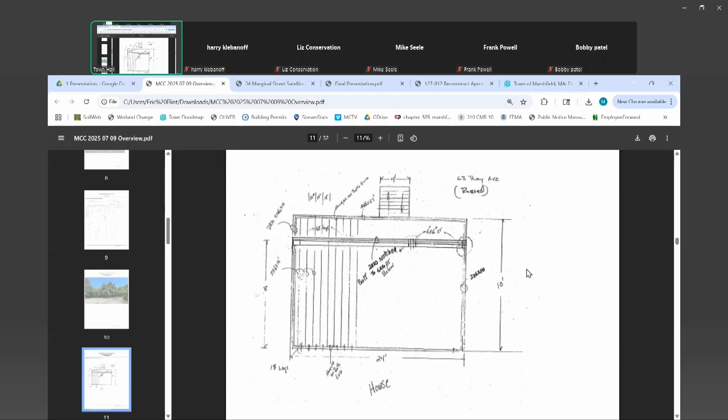Please state your name for the record. Douglas LeBon. Can you go over what the project is? Yeah, basically there's an existing deck there now. It's 24 by 8, we're gonna make it 10 by 24 and relocate the steps like it shows there. We're gonna put the footings back in the same spot, but we're gonna be using diamond pier, so there's no real penetrations. We're basically just looking for permission to use the diamond pier footings for the project. Okay, yeah, I visited the property. I saw, this stuff needs to be replaced. Yes.

The building commissioner had a comment about this project. He said on their plans they show a concrete pad at the base of the stairs, but the code requires a frost step footing, like a sonotube or diamond pier. Slabs like that for stairs are not recommended in areas like Bay Ave. Add one more diamond pier at the stairs. Okay, yep. All right, I think that would resolve that issue.

Mike, did you have any comments? Yes, I would suggest the following on the cover letter for this project: ensure best management practices are followed before commencing the work, obtain all pertinent permits, and see the conservation administrator or agent for work beyond the approved work activities.

Are there gonna be any changes to the area underneath the deck, or is that gonna remain the same? It's just the same. It's gonna cantilever out 2 feet. But as far as any material underneath the deck, no, just leaving the sand and everything like that, yep.

Do any of the commissioners have any questions or comments? I would just state that if you can amend the plan to show that you're going to do the diamond piers and not the slab. Yep.

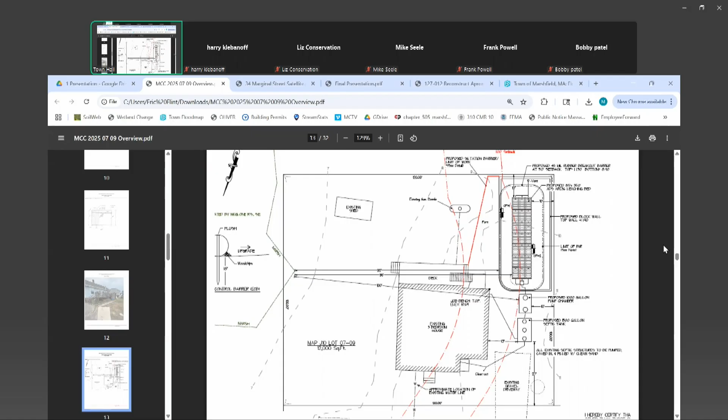Okay, yeah, I was out there the other day. It is going to be a tight fit.

Yes sir, I think there's a fence bordering that corner. And then a bunch of, like, 8, 9, 10 trees are going to have to come down. There's some trees along there that are marked. I was counting, and there were some things that weren't marked that I thought might have to come down as well.

It's going to be fitting there. The Board of Health has approved the project.

I mean, it looked pretty straightforward to me. Obviously, whenever you're getting rid of a cesspool with a state-of-the-art septic system, it's a step in the right direction.

Michael, do you have any thoughts on the project? Yes. The upgrades to the septic system would include the following: a 1,500-gallon septic tank, a 1,000-gallon pump chamber, and an 8.5-foot by 35-foot leaching field.

A portion of the leaching field will be within the 100-foot setback, and the property is within an AE10 flood zone.

I would suggest the following conditions: ensure best management practices are followed before commencing the work, obtain all pertinent permits, see the conservation administrator or agent for guidance beyond the approved work activities, and have a siltation barrier in place throughout the duration of work, as noted on the site plan.

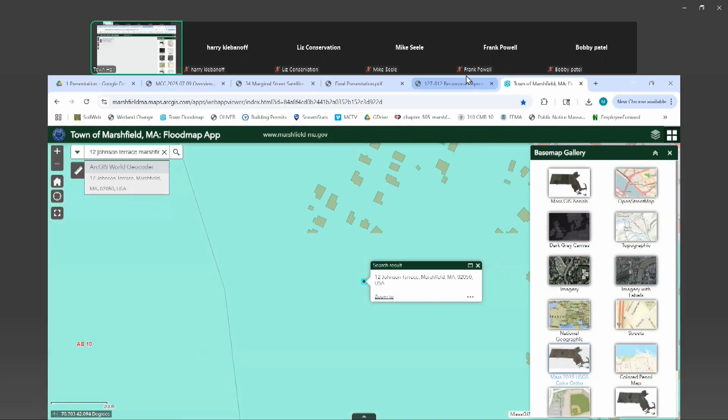The salt marsh is at the end of the street, not far from there at all. Within 100, but is it within 25? I think it's a moot point if it's past that. I think that whole area is in the flood zone, isn't it? Yeah, it is. I just assumed it was.

Is there anyone on Zoom or in the public that has any comments or questions on this?

Mike, do you want to list out your comments here? Yes — ensure best management practices are followed before commencing the work, obtain all pertinent permits, and seek guidance from the conservation administrator or agent for guidance beyond the approved work activity. Also send photos of the completed work to myself or the agent.

Do you have a question? I do — Mike, the access form and the fee?

Oh, you're assigned right now. Yes, the homeowner later came back and paid the after-the-fact filing fee. He was very adamant and refused to sign the site access form. I gained access to the other side of the drainage ditch through a different property that allowed me to access the site.

It's a fairly small section of the drainage ditch, and I'd be comfortable with photos. That's fine. I just was curious on that. It is atypical, though — thank you for pointing that out. Sorry, I didn't explain that.

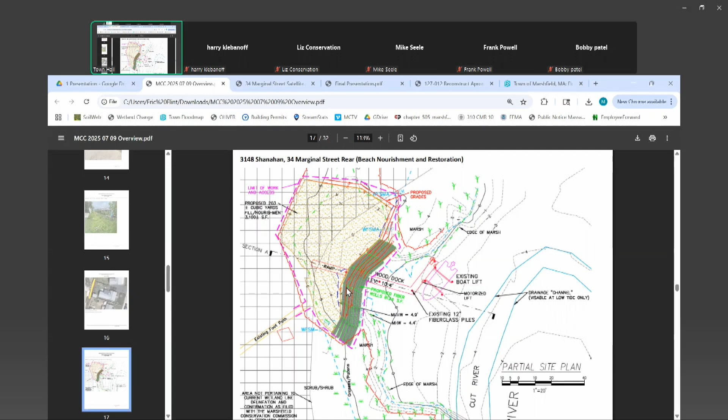Mike, did you have any comments on this?

As you can see, the applicant is proposing to place about 203 cubic yards of fill/nourishment to this highlighted area, and it's proposed to be supported by these coir logs as well. This amount of fill would need a variance from the zoning department. This is the area roughly where the coir logs would go, and then this area behind would be the area to be filled.

Are there any comments from the commissioners at this point? I've got one. Mike, it references, was it 11 Naomi, quite a bit? Yes, I was around when that one was permitted, but I can't recall.

I recall using the coir logs. Was there any fill associated with that one? I would have to take a deeper look into that project folder, but to my knowledge there was no fill associated with that, or minimal fill compared to the scope. I think they had backfill to do the plantings within, to facilitate plantings. Yeah, it wasn't as extensive as mine, but.

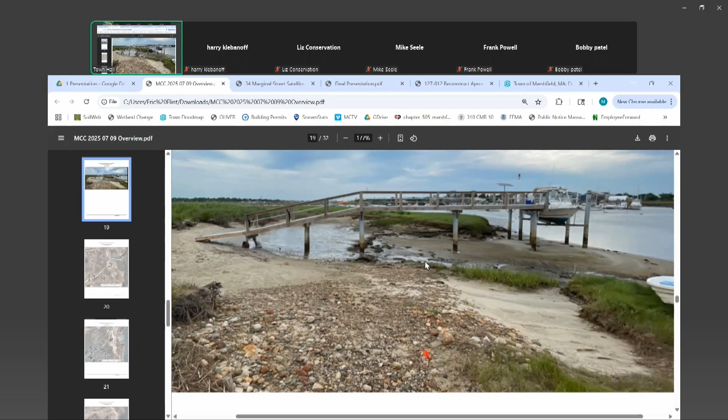So I'm sorry to be long-winded, but when regulations are written, they're written a lot of times for a certain purpose. A lot of the regulations, especially in the floodplain, are written for development of a site, for a house, with your setbacks and all of that, I get it. And they don't necessarily focus on shorefront erosion or the environmental issues and natural occurrences of ocean processes. It's just not on their radar because it's not a great percentage of the projects that they see. So when somebody says you can't fill in a floodplain, okay, if you're doing it for a house, I get it. Nourishment, can't avoid that terminology, but beach nourishment is generally a good thing.

The only time beach nourishment is a bad thing is if you are nourishing an area that has shellfish in it, or you have fronting salt marsh, which we don't have. If you overnourish, that nourishment washes in and buries the salt marsh, and it can only compensate for about a foot of elevation a year. It buries the salt marsh, wipes it out. So there are cases where nourishment is a bad thing. I do not believe that this is one of them. So I guess I'm interested to hear why this project is so different than 11 Naomi Road. That would help make some clarifications for me.

With that, I'll open it back up to the board. Do you want to respond, Corey? So I wasn't here when Naomi Road was permitted, but as far as I know, that project put the fiber rolls directly onto the bank and didn't put fill behind them. So they didn't try to extend the beach area, they just put them on the bank to stop the house from falling in. But I could be wrong. Do you recall? Comparing this to Naomi Road, I believe, is apples and oranges. It was a different resource area, and yes, it is not the same as this.

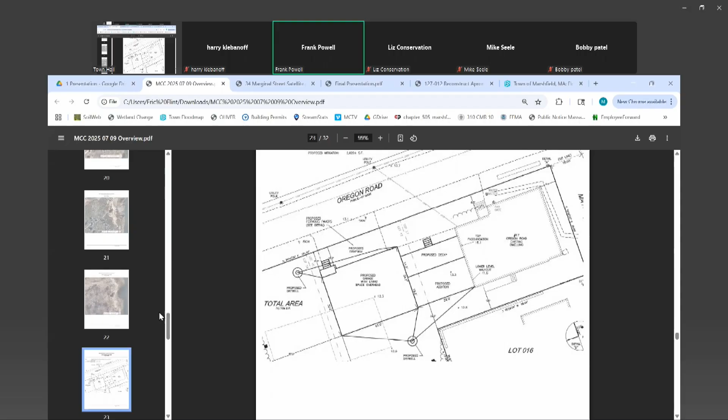It is closed. You know, Chairman Hanafin, you are the most unprofessional person. You have no personality. I muted Mr. Powell. That's okay, I think that's a requirement. Thank you for your comments. Okay.

Now we need to go back to our first hearing, which was 915 Ocean Street. That's Mr. Patel. Yes. Okay, this is...

He has two screens open or something. Sorry, Mr. Patel, I'm going to mute you until you're ready to speak because there seems to be some issue with our feedback where we're hearing our own voices coming through the audio. So feel free to unmute yourself once it's time for the applicant comments.

Okay. So this is an after-the-fact RDA, correct? So the property owner repaved a portion of the property without permitting. It's in land subject to coastal storm flowage and buffer zone. So the enforcement, there was an enforcement order in 2018...

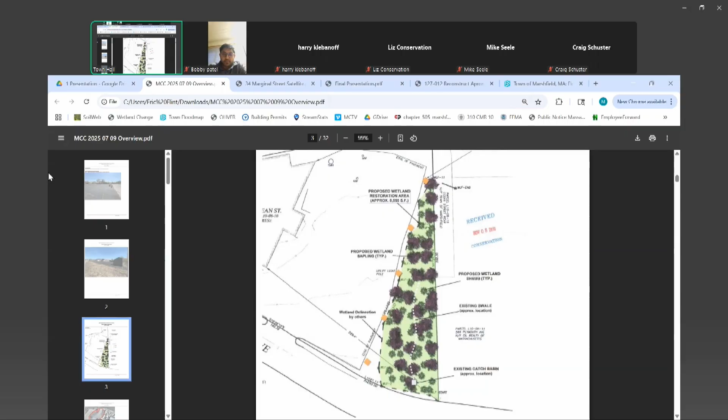My comments would be to install the conservation markers, the 5 markers as noted on this planting plan, ensure best management practices are followed, obtain all pertinent permits, and seek guidance from myself or the agent for any work beyond the approved work activities.

Okay, any other comments from the public? Hearing none. From the commissioners? All right, well then I'm going to make a motion that we close the hearing and issue a DOA with a +5 and a -2. May I have a second? Second. All in favor? Aye. Aye. Okay, Mr., okay, you're all set. Thank you, have a good one. Thank you.

SE 3147 has requested to be withdrawn. Do we just withdraw? Do we have to? It never opened, right? It never opened, so if it never opened, I don't believe we have to create a motion. We have to withdraw it since it was never opened. Okay.

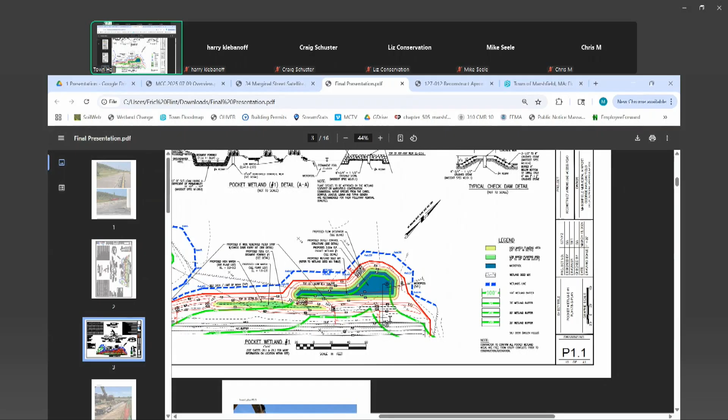So the next slide shows you what the new design is. That's moved 13 feet to the northwest, and while it looks a little bigger than the other pocket wetland, it's actually smaller by some 224 square feet. It's designed to comply with DEP stormwater regulations, which is why the design configuration has changed a little bit. But it's actually a little smaller than the previous design by 224 square feet, and we want to move it 13 feet toward the northwest to provide that safety strip.

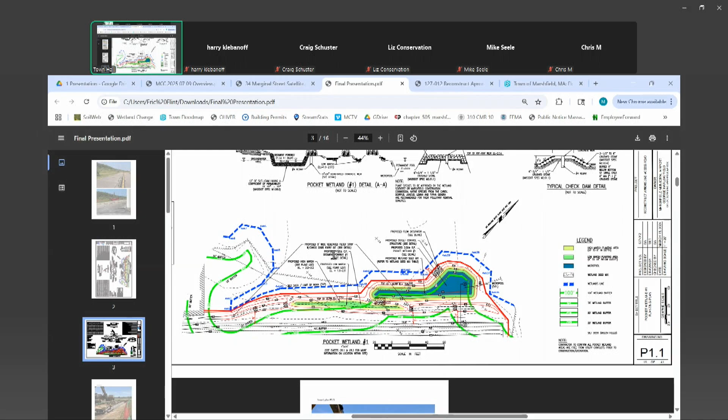Now, that's not much of a problem, because it's just moving it onto the grass strip. It's not moving it into a wetland or anything - in fact, it's creating a wetland. But it does initiate other issues in terms of trying to get equipment to it to build this pocket wetland number one.

The original design did not consider the fact that equipment was going to have to move through parts of the airport that would possibly present conflicts with aircraft. So the contractor from Lawrence Lynch has suggested they would like to build a temporary bridge across this drainage structure, which is part of the approved project. This is a drainage ditch being revised to allow pipes to be installed to improve the drainage. This is all part of the original design that's been approved.

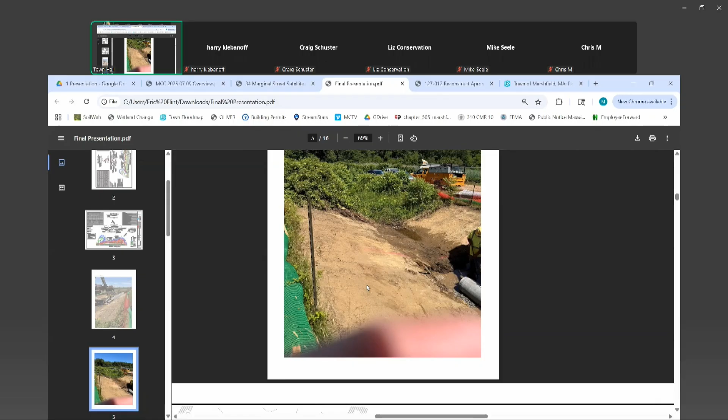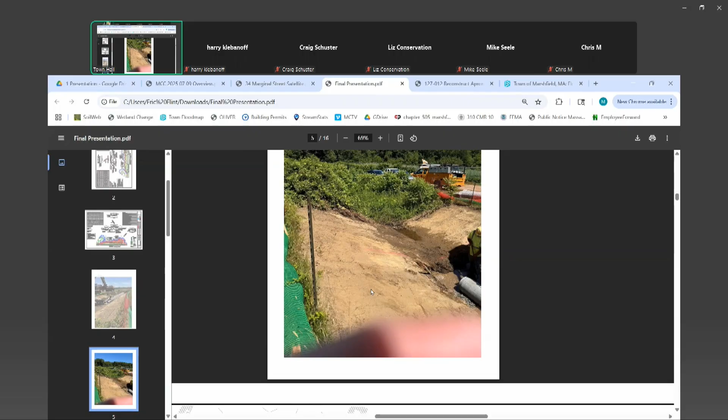This is at the end of the existing pipe where the head wall may be going, looking toward the area where we want to cross with a temporary bridge to reach that grass strip, so we can build pocket wetland number one without presenting conflict of equipment with aircraft coming in from the other end of the airport. This drainage ditch being cleared and constructed right now abuts, to your right, the access road to this part of the airport. There's a roadway you can't see here, but that's the access road out to the airport, and that's part of what this project is improving as well.

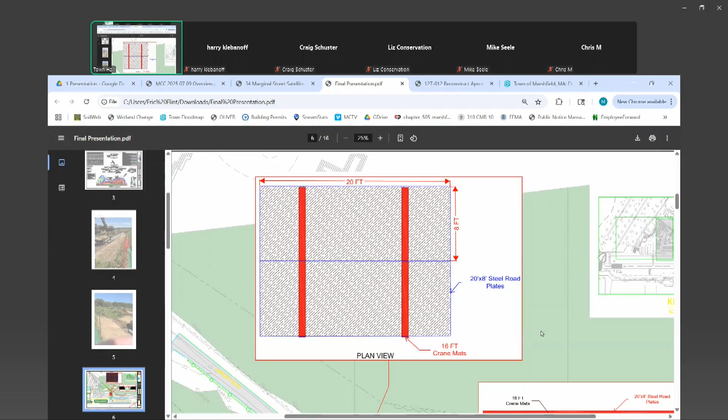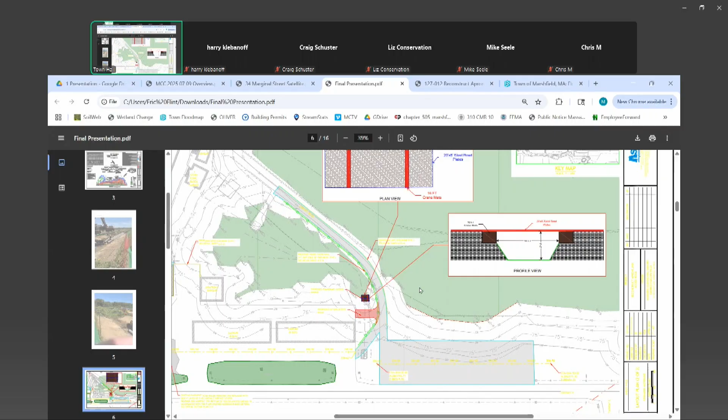This next slide shows you the proposed temporary bridge structure. It's that small black square above the red, what looks like a bridge in the lower right where Mike has the cursor. That black square is what's pictured to the left in the center - a cross section of it.

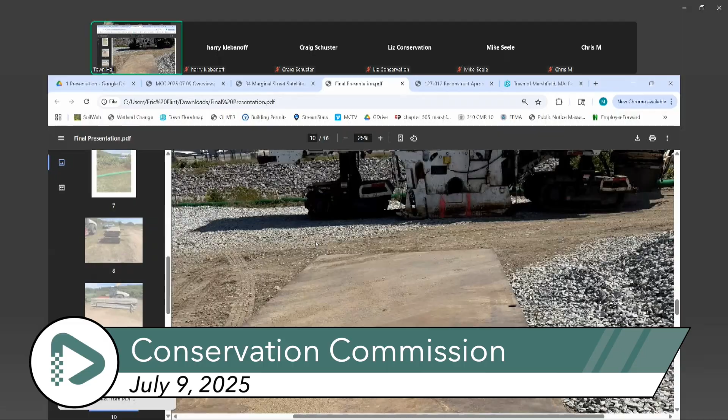It's constructed with 16-foot-long wooden crane mats, which are those black squares. They're 16 feet in length, and they're buried into the side of the drainage ditch. That's what those mats look like - that's the butt end of the mats. You can see them from the side in the next picture - that's what the side of those mats look like. They'll be buried into the side of the drainage ditch, then topped with road plates, which are 20 feet by 8 feet in width, steel road plates, forming the surface of the bridge so equipment can cross the drainage ditch from the access road to the area where we want to build pocket wetland number 1, which is again 13 feet deeper into that grass strip.

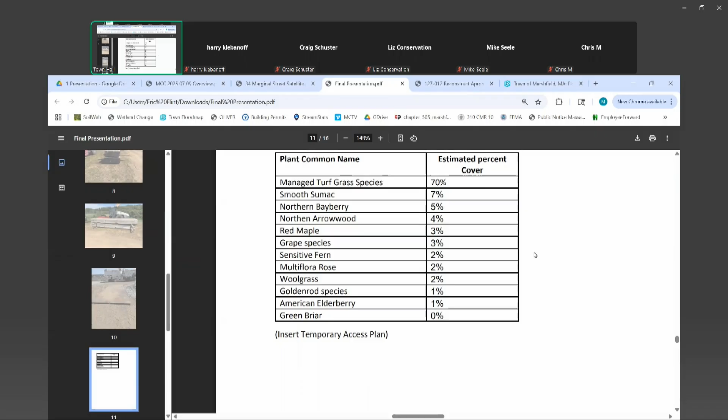That describes the project. I think what the next photo shows is the species of vegetation that are likely to be encountered in the drainage ditch itself when they put this thing in. This thing is probably going to be about 30 feet wide when it's all done. The disturbance will be about 30 feet wide because they have to get in there with equipment and clear it out. But once construction is completed,

the bridge will be removed, the beams will be removed, and the vegetation will be allowed to grow back. So it's a temporary measure to avoid conflict. It's a safety issue, and it's only a temporary situation.

This next photo is the third issue we're going to talk about this evening, involving another pocket wetland, number 3. The red rectangle you see represents the platform which fuel trucks pull up onto to refuel or to transfer fuel from the fuel storage area, which is depicted to your left of the red rectangle. That's where the trucks pull up onto, and that's where the fuel exchange takes place. Some fuel is pumped in, some is pumped out.

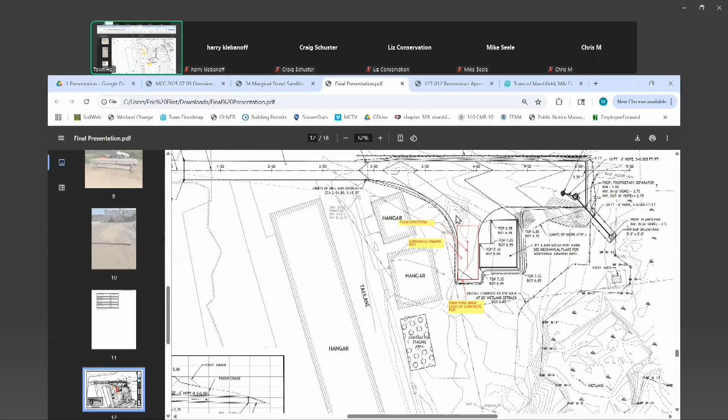On this plan, you can see to your left a wetland line. Mike, if you can put the cursor on that dotted line down to the left. See that wetland in there? Yes, the wetland flags here, that's the wetland area. That fuel facility was built back, I don't know, maybe 5-6 years ago.

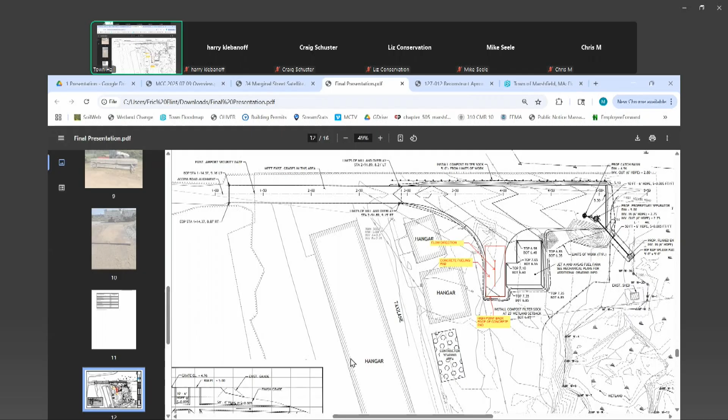It was permitted. And those wetlands are about 55 feet away from the edge of that fuel parking area, the red rectangle where the trucks park. That's the original setup. Now, if you go to the next slide, Mike, this is a picture of the new pocket wetland number 3, which is being constructed.

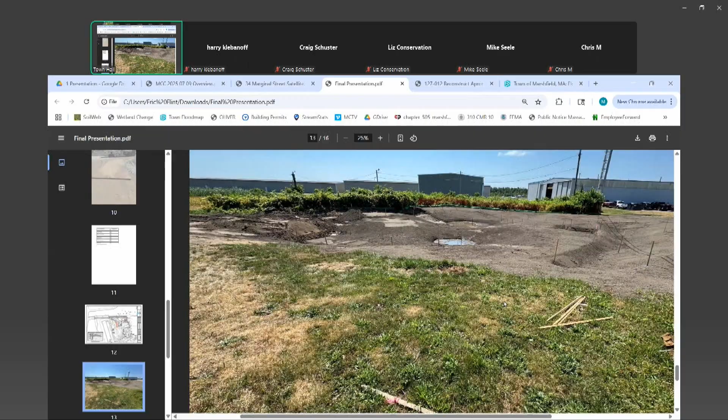That picture I took the day before yesterday. You can see it's a fairly complex pocket wetland with a lot of different weirs, et cetera, that are going to be installed in it to provide for treatment of stormwater. However, on the left-hand side, which you're looking at, it abuts right up against the edge of that platform. So if you could show the next slide, Mike.

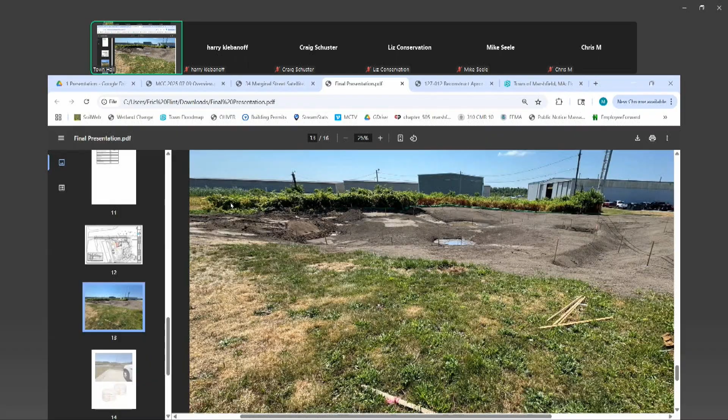You can see that's the edge of the platform, and that's where the pocket wetland is. So this new pocket wetland, which didn't exist before, is being constructed right up against that fuel facility. My suggestion to you is that you might want to consider

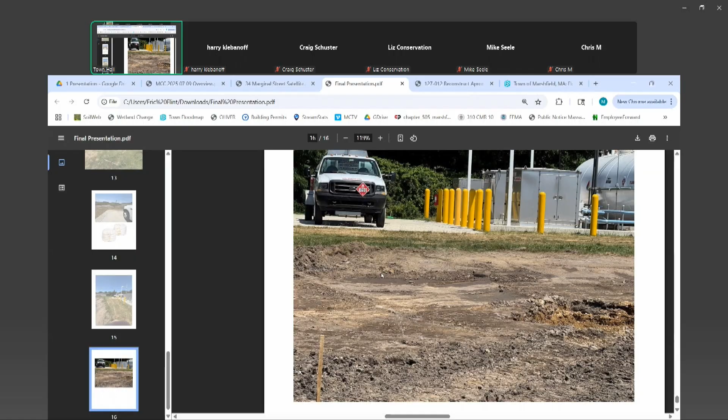Bill, the pocket wetland, everything just, the stormwater isn't carried anywhere else, it just infiltrates in the wetland there. There are a bunch of weirs in there, and some of it is going into the other wetland that's already existing, is the way it's designed.

Pocket wetlands are typically implemented with high groundwater areas. They have micro pools and deep pools, so it allows the water quality volume, like the first flush of runoff, to remain in the wetland and basically evaporate, as a wetland does. Then for higher storm events, it will go over an outlet control, a weir. I haven't seen the design of this, but that's typical.

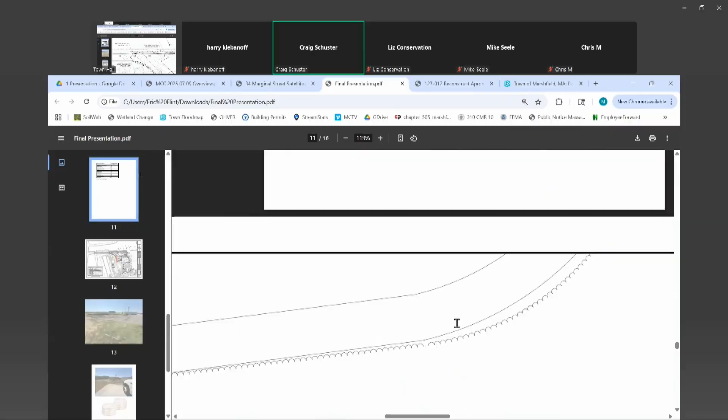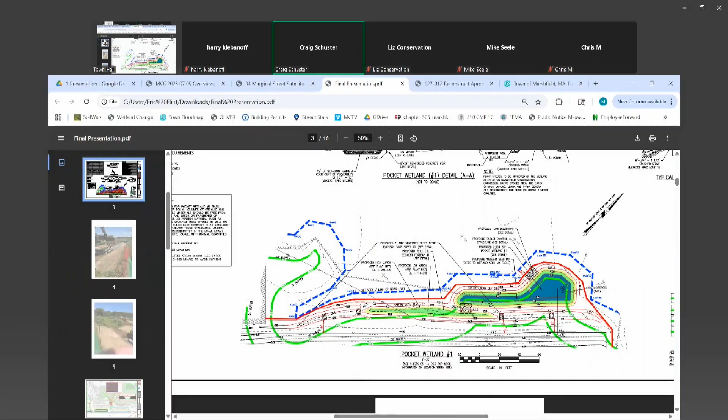I think we have the design. Craig, do you have a plan? Yeah, Mike, what you just said is correct. It's like you handle the first flush and it's really retention, then the higher storm events eventually go over weirs and other things and do go into the wetlands. That's basically the gist of the stormwater treatment systems we have. That's not it, no, I don't think we have wetland number 1 there, Mike. I have the full conformed set. Do you know what page it might be on? Like S11, P11? I think it would be P3. Possibly, I'm satisfied on the plans.

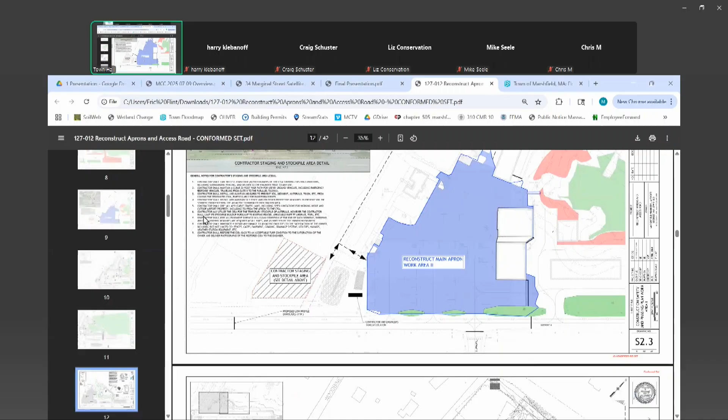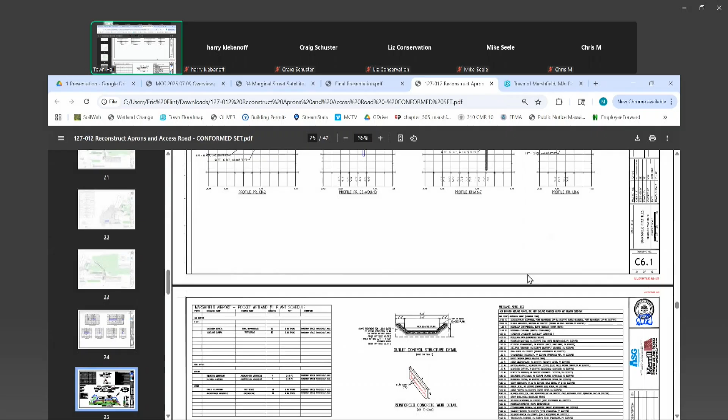My question's been answered. Typically they're planted, vegetated with wetland plants. It's a vegetated wetland. Yeah, they will be planted. There's plantings that are usually highly efficient for nitrogen removal and phosphorus and stuff. This is right on the water table. Right now you can see the water table where they're constructing it. There's a couple of places where they're actually in the water table.

Yeah, I believe this is it. There's a plant list there. Craig, do you want to say anything about this? No, because we had Merrill design this, and because he specialized in this stuff, Dana Annabella from Merrill helped us with this thing, so I've got nothing more to add to what's already said.

So what we are looking for is some approval from the commission this evening to move ahead with the temporary bridge structure, as I say, which is temporary, and also the approval to move pocket wetland number 1 13 feet to the northwest in that grass strip, just to get it away from the edge of pavement of the taxi lane.

Is there any issue with downsizing that slightly? No, it was downsized because of DEP regulations, so it could comply with DEP regulations. That's why it was downsized. And Merrill did it that way. Correct, Bill, that is correct. I talked to Dana today about that, and it's all functioning the same way that it was permitted, it's just a different size, but it doesn't affect how we're addressing stormwater at all. It's still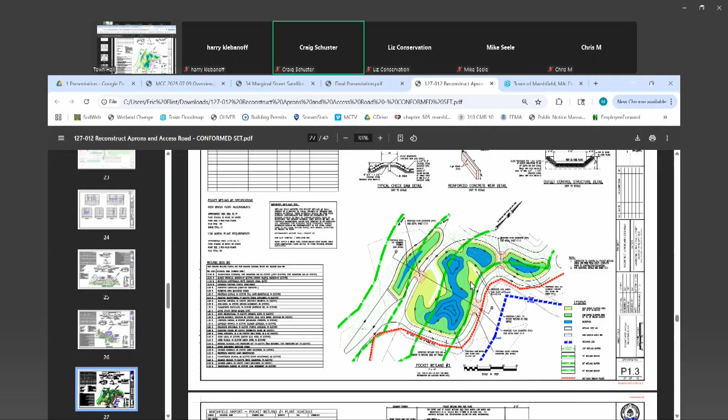Okay, it looks good to me. Anyone have any questions or comments? I could suggest a de minimis change to the site plan to be captured on the as-built site plan. Yep, that works, that's fine. Okay, I move that we approve this as a de minimis change, which will subsequently be reflected on the as-built site plan. May I have a second? Second? All in favor? Aye. Aye.

As far as the fuel absorbent boom, we'll discuss that with the Airport Commission, and we'll let you know. We think they'll do it, but we have to discuss it with them. Okay, it's just an idea. Seems to make sense. Yeah, it seems to make sense. Okay.